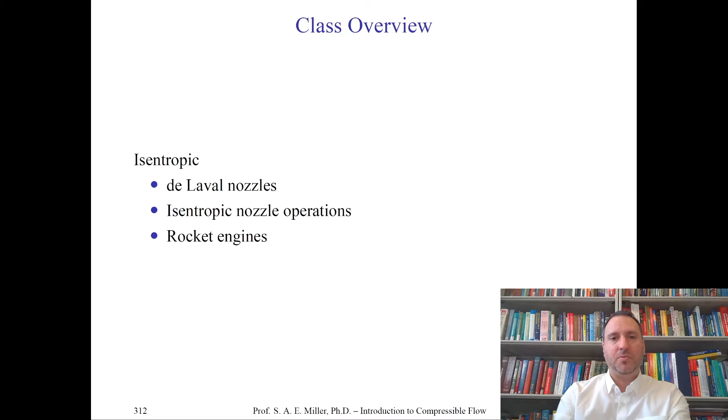Let's start off the class with a fun quote from one of the most famous people in aerospace engineering, Wernher von Braun. He wrote that the rocket worked perfectly, except for landing on the wrong planet. This was his comment on the V-2 rocket landing in London in 1944. This is written and quoted in Apollo in Perspective, Spaceflight Then and Now.

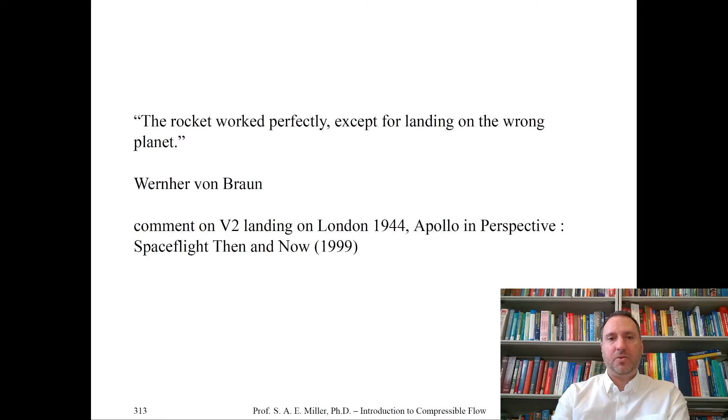Dr. von Braun was a remarkable figure who rose through and developed rockets during World War II and before, in Germany. During World War II, he developed the V-1 and V-2 rockets, used to bomb the United Kingdom. His ultimate goal was always to take rockets and propel people to outer space orbit and eventually other planets. In Operation Paperclip and beyond, he came to the United States and led NASA and the Apollo program, and without him, the United States would never have likely put man on the moon.

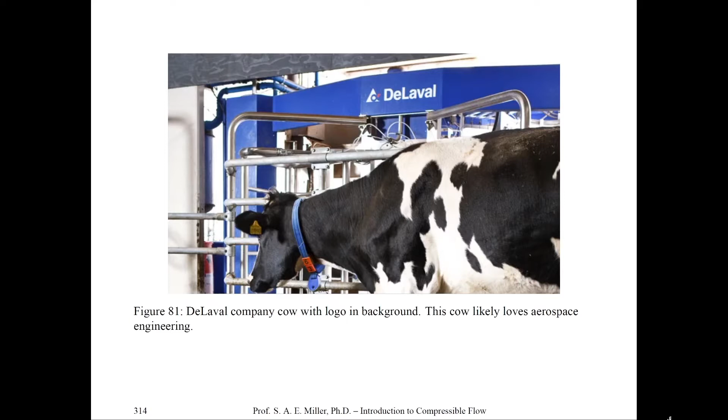Here is a picture of a cow. You might be asking yourself, what do cows have to do with aerospace engineering? I've put this particular figure, which I've labeled the DeLaval company cow and logo, in the background. You'll see the logo up top, DeLaval. And it's very much possible that this particular cow loves aerospace engineering. I wouldn't have any doubt about it.

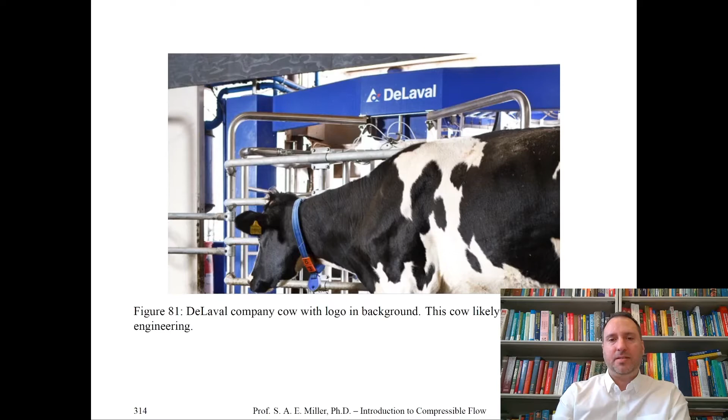And you might be wondering now, in this aerospace engineering class on compressible flow, what does a cow and the dairy industry have to do with aerospace engineering?

Here's the description from the company website. It says, DeLaval is a worldwide leader in milking equipment and solutions for dairy farmers, which makes sustainable food production possible, ensuring milk quality and animal health. DeLaval's solutions are used by millions of dairy farmers internationally every day. DeLaval was founded more than 130 years ago in Sweden, when the visionary Gustav DeLaval patented the cream separator. Today, DeLaval has 4,500 employees and operates in more than 100 markets. DeLaval, alongside Tetra Pak and Sidel, is part of the Tetra Laval group.

So, of course, it's no longer a standalone company. This quote was taken from their website in 2019. DeLaval himself was an amazing engineer and played an important role in creating one of the most important devices that powers rockets and aircraft engines and many other aerospace devices today.

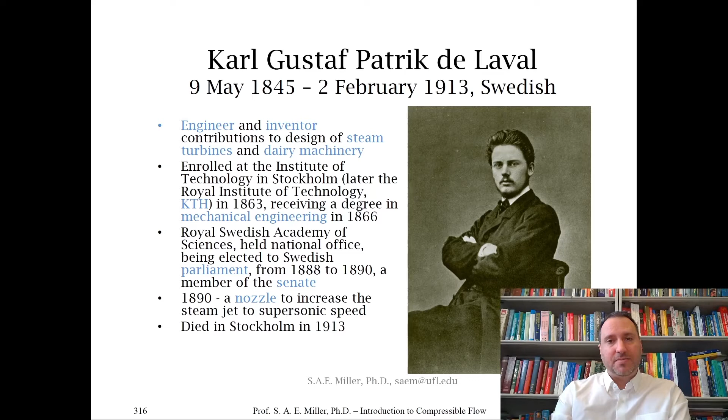Let's take a second to appreciate Karl Gustaf Patrik de Laval, pictured on the right. I think I see a few haircuts around campus just like Gustav's. You'll see that he was an engineer, inventor, and contributed to the design of steam turbines and dairy machinery. He enrolled when he was pretty young at the Institute of Technology in Stockholm, later the Royal Institute of Technology, called KTH, in 1863.

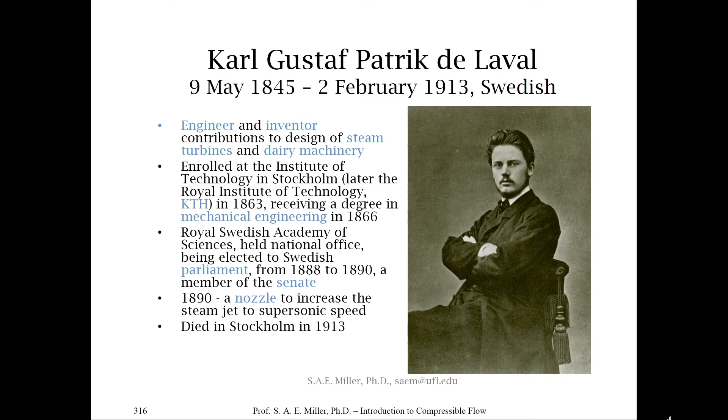I had the honor of actually going there during a conference and giving a seminar. He received his degree in mechanical engineering in 1866, like some of you are today, and he was in the Royal Society in Sweden in sciences, and he also held a position in Parliament, so he was a very multivalent person. Most important for this class, in 1890, he designed and created a nozzle to increase the steam jet to supersonic speed. And you see the connection now, because in the previous classes we looked at choking and accelerating flows to supersonic Mach number. He passed away in Stockholm, a beautiful city, in 1913.

A few other notes on DeLaval. He is the real originator of the Convergent-Divergent nozzle. He designed Convergent-Divergent nozzles for steam turbines to power dairy machinery. In the previous class, we looked at another of the company's designs, of course, for choking flow through a particular system of butterfly valves and a choked convergent nozzle to control mass flow rate exactly.

Indeed, he was Swedish and he worked in industry and mining, and left for his Ph.D., which was probably a good decision at the time. He started his own company in Stockholm that made cream separators, and he held these Senate positions.

What's interesting about DeLaval is he did this work intuitively, physically intuitively. Indeed, he had no knowledge, or at least no proof that we have at the time, that supersonic flow actually existed inside nozzles. This was not proved experimentally or really mathematically until many years later, in the laboratories of Prandtl in Germany.

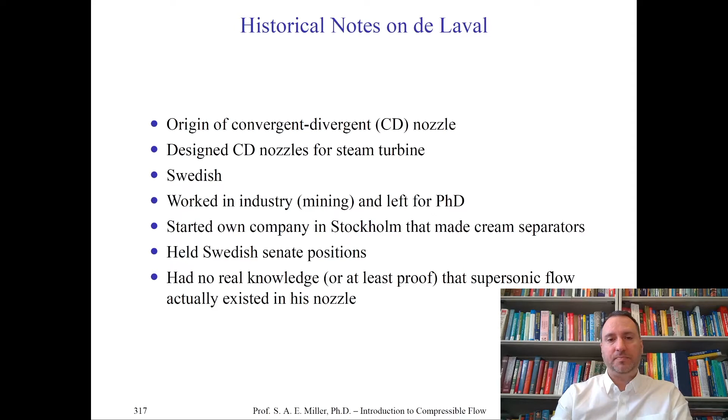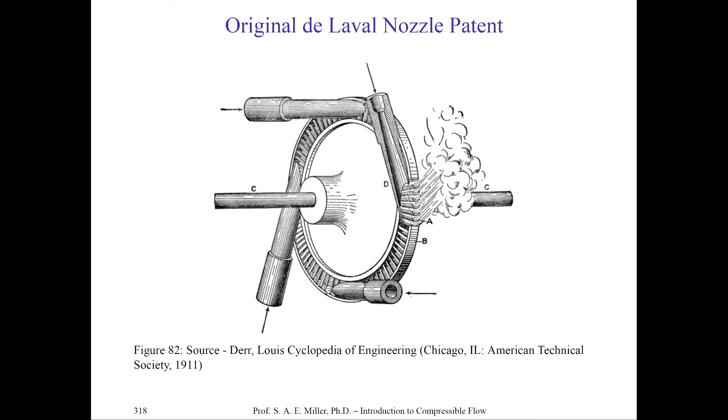These little nozzles, four of them in the cream separator design at least, allowed superheated steam to travel down through the plenum, through a convergent portion of the duct, through a choked condition, and then expand out and blow through the turbine, which rotates it.

This increased the power and efficiency of these particular turbines, which made his company world known. What's interesting is he did this design intuitively. He had no real physical understanding and justification of why this was working. This was done, once again, as I mentioned later, by Prandtl's group in Germany.

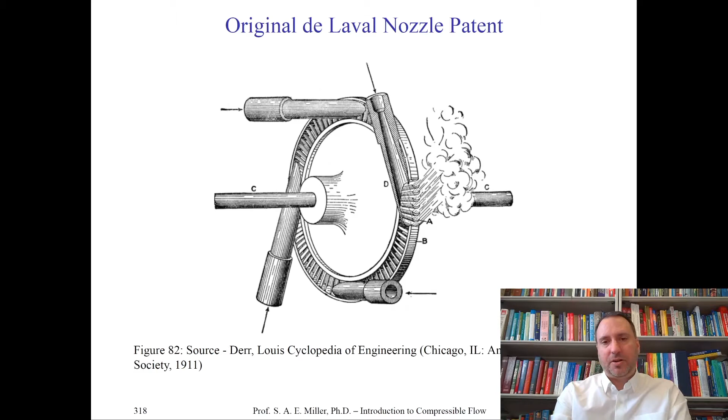Let's look at a more contemporary design from, of course, the DeLaval nozzle, which just refers to a converging-diverging nozzle. This is a picture I took from NPO Energomash in Russia, a Soviet company which still exists today under an umbrella company in Russia. This particular engine is the RD91 engine.

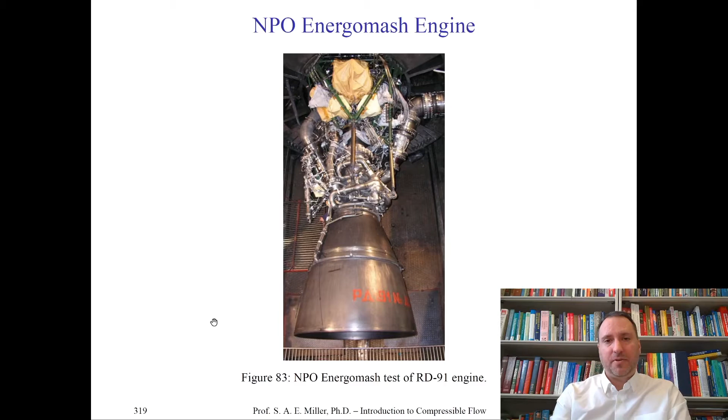Beyond all the ductwork above, you can see inside there's a combustion chamber, which is essentially a large plenum, and then there's a throat or choking area where a critical condition occurs, and the cross-sectional area of the nozzle increases to accelerate the flow out to the exit of the nozzle plane, which is this bottom part at the cursor. So we have gone, in less than a few decades, from cream separators to high-performance rocket engines.

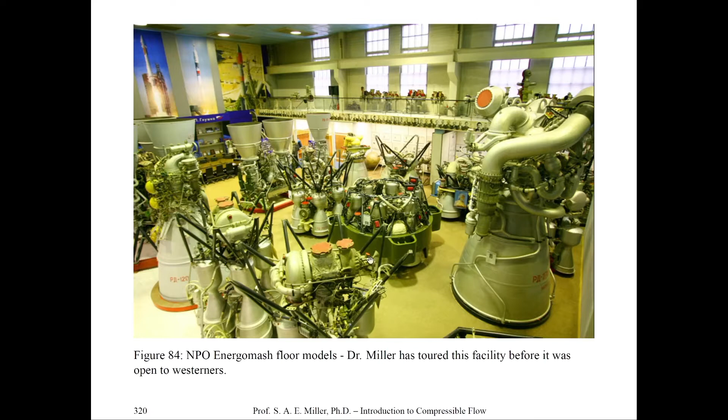Here's a picture of a series of rocket engines developed in the Soviet Union and Russia by NPO Energomash. This is their floor models. I had the fortune of touring this facility before it was open to Westerners when I was younger. You can see what's interesting is there are many different rocket engines, and from the combustion injector plate in each part of the plenum, for each of these types of RD nozzles...

...you can see there's, of course, a cross-sectional area which decreases. The flow goes through a convergent part of the nozzle. It is choked at Mach 1 and then is accelerated by increasing the area.

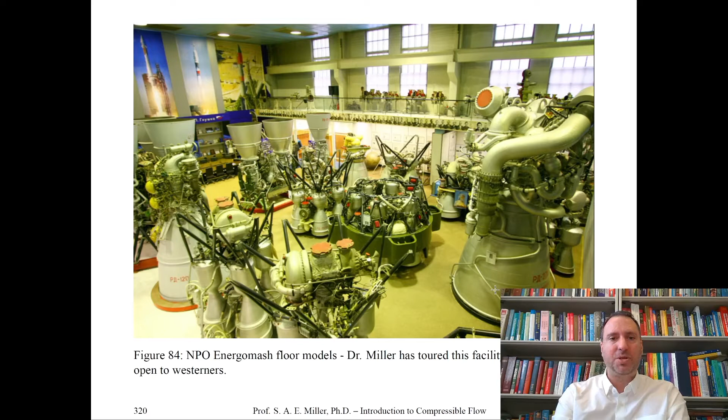You might be wondering, well, why don't we design the areas to be more aggressively increasing? Because that would decrease weight. Well, there's a lot of reasons for that which we'll talk about later in the class. For now, we'll just consider one-dimensional isentropic flow and get into shock waves. I think you'll see this is much more complicated than one-dimensional isentropic flow.

They all operate on the same principle of taking a high pressure, high temperature gas and accelerating it, choking it, and accelerating it out, taking the internal energy of the flow and converting it into kinetic energy, which of course creates thrust.

You'll see contemporary aircraft engines also use the same principles. It's all the same principle of taking the flow and efficiently converting as much of the internal energy as possible from the combustion process into kinetic energy, which creates thrust.

You can assess these types of engines with the basics of Reynolds transport theorem, which we already introduced, by using a combination of isentropic theory to convert internal energy into kinetic energy, and then doing a control volume approach with appropriate mass flow rates of injection for fuel and oxidizer with its exit velocities to find thrust. We'll try some of these problems in this class.

If we only had a converging nozzle, meaning we take away the divergent part, you'll see that our exhaust Mach number would only be limited to 1. So by adding all this weight, we gain a tremendous advantage in thrust. It's worth the cost of weight because we've created a high-speed, high Mach number flow, which increases thrust, and extracts more of the internal energy of the flow into kinetic energy.

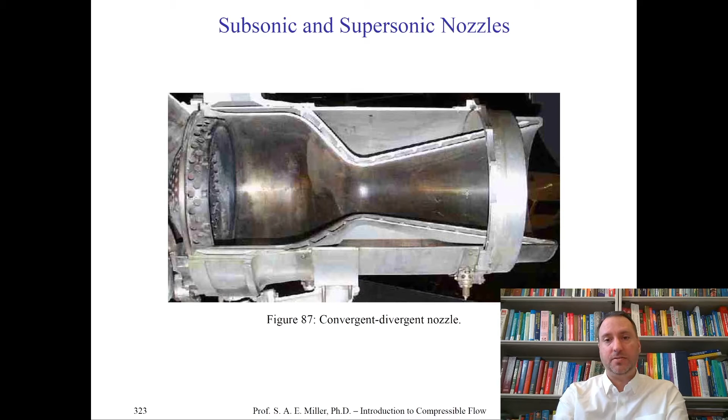Let's look at one example of this particular case for this particular engine. Once again, there's a minimum area, and we label that A-star, which is the critical or choked area. It has a Mach number, M-star, of 1 by definition, and U-star, the velocity at the throat of the nozzle, will be, of course, a-star, which is the speed of sound at the throat.

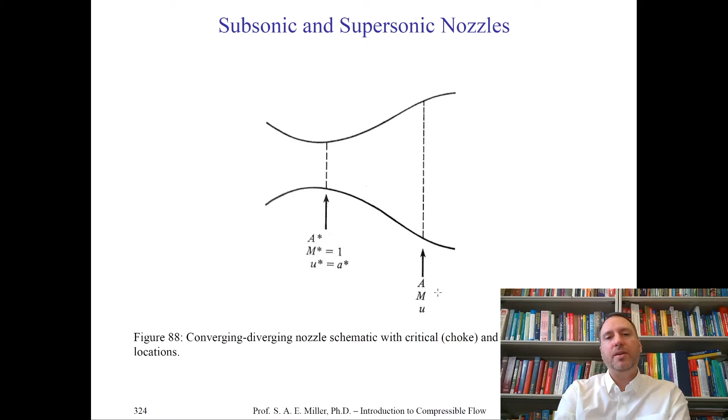At any other position, we've developed our isentropic tools, at least, to estimate the Mach number, velocity, and area. Remember, through the Mach number area relation, we can find out the Mach number at any other area relative to the choke condition, and from that Mach number and other thermodynamic conditions of P-naught, T-naught, etc., which are constant through the nozzle for isentropic flow, we can calculate all other thermodynamic and field variable properties.

Fascinating. Let's return to the derivation of the Mach number area relation to put it in a form which is a little bit more useful for the nozzle problem and problems alike it, which we'll use through this class. We'll again seek the Mach number area relation.

Please remember that we can choke the flow at the minimum A. If the flow is choked, and it doesn't necessarily have to be, but if it is choked, we'll call that area A-star, the critical area or area of a choked flow, minimum area in a converging-diverging stream tube. Recall the conservation of mass.

Rho U A equals rho U A at station 1 and 2. We'll just let station 1 be noted by sup star. So rho-star, U-star, and A-star in equation 264 of this slide deck corresponds to the density, velocity, and area at the throat of the nozzle, which is right here. The right-hand side, rho U A, will be any other position marked in A as a function of x, for example, from, say, the inlet or outlet of the nozzle.

A is only a function of x in this case. It has area, Mach number, and velocity. So now we've balanced the mass conservation.

Now look at the left-hand side and note that because M equals 1 at the choked condition by definition, we can write U-star equals C-star through the equation M equals U over C, or 1 equals U over C, therefore U equals C-star. Let's substitute that into our equation and solve for A over A-star. So that's what we have in equation 265. And let's simplify that a bit.

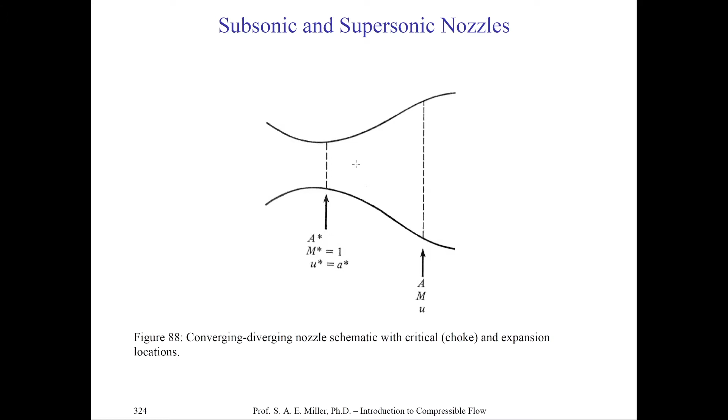That means the stagnation density rho naught, stagnation temperature T naught, and stagnation pressure P naught are constant through the flow. So we can use our critical condition previously developed for rho, and write rho naught over rho star equals gamma minus 1 over 2, to the 1 over gamma minus 1.

See why I developed this relation related to equation 265 in our recollection. We developed 266 in a previous class.

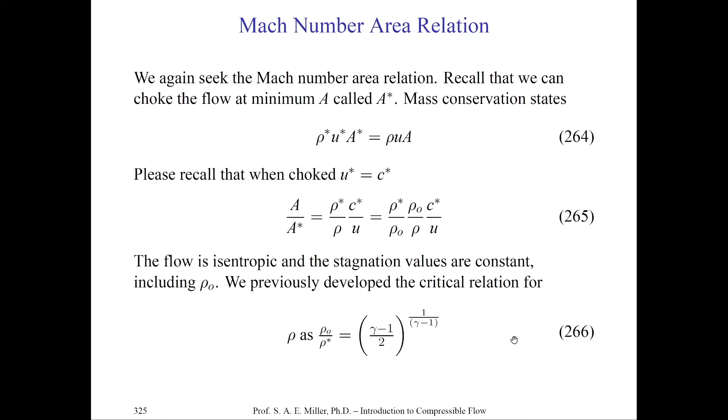Also recall that we developed a relation for C star. Remember, M equals U over C, therefore U over C star squared goes as M star squared. And we developed our critical condition of M for 1, goes as gamma plus 1 over 2 M squared, all over 1 plus gamma minus 1 over 2 M squared. That was also from our previous class.

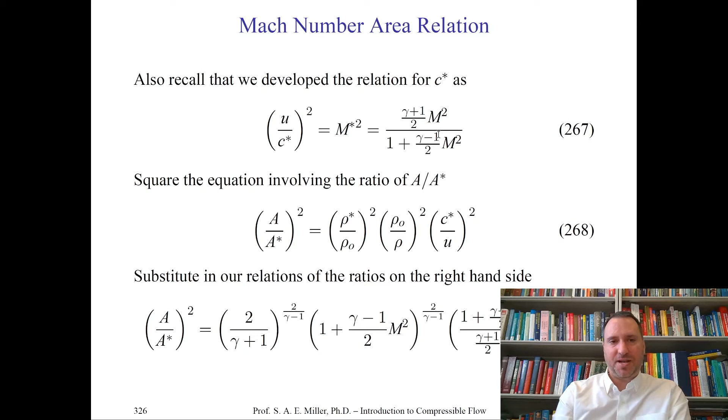Now we might imagine we can square the equation involving the ratio of A over A star, equation 265, squaring each term according to the laws of algebra. We'll now have A over A star squared goes as rho star over rho naught squared, rho naught over rho squared, times C star over U squared. Now we can easily substitute our relations of U over C star squared and rho naught over rho star into 268, and we'll find equation 269 on the slide deck.

Now we'll have A over A star squared equals 2 over gamma plus 1, to the 2 over gamma minus 1, times 1 plus gamma minus 1 over 2 M squared for the second term. And the third term from 268 to 269 is 1 plus gamma minus 1 over 2 M squared, all over gamma plus 1 over 2 M squared.

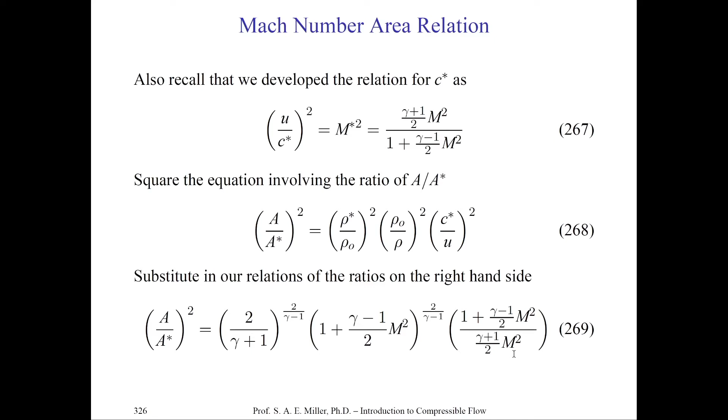Let's now try and simplify equation 269 on the slide deck to something a little simpler, which I've done for you, and you're welcome to try this yourself.

We now have a beautiful form of the Mach number area relation for choked flow. It goes as A over A star squared equals 1 over M squared times the quantity of 2 over gamma plus 1, times 1 plus gamma minus 1 over 2 M squared, in the quantity of gamma plus 1 over gamma minus 1.

Look at this equation carefully. You'll see the most familiar term in this class, 1 plus gamma minus 1 over 2 M squared. We see this term coming up over and over. And in fact this is no coincidence.

You'll see in the isentropic tables, which we formulated and given in the class handouts, one column for A over A star, and the first column as Mach number. Therefore you can easily evaluate this equation for Mach number or area ratio, as long as the flow is choked. That's the meaning of A star. We now have the all-important Mach number area relation.

This equation shows M is a function of plus or minus A over A star. There are two values indeed of M corresponding to the solutions of this equation, as we discussed earlier in a slightly different form of the area Mach number relation and its derivation.

These relations of all these values, including A over A star, are tabulated in the famous isentropic tables of NASA Ames, the so-called Ames tables, which I've put in as a file, an original PDF copy in your class handout. Some of the graphs in the class handout with the tables are photocopies, essentially, attached to the tables. Remember, there are no mathematical or physical solutions for A over A star less than 1.

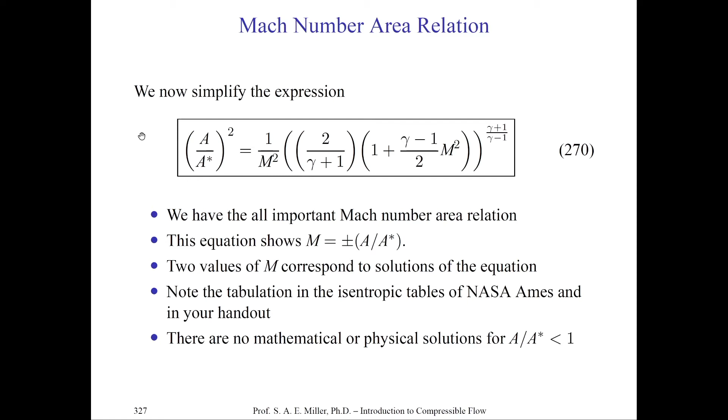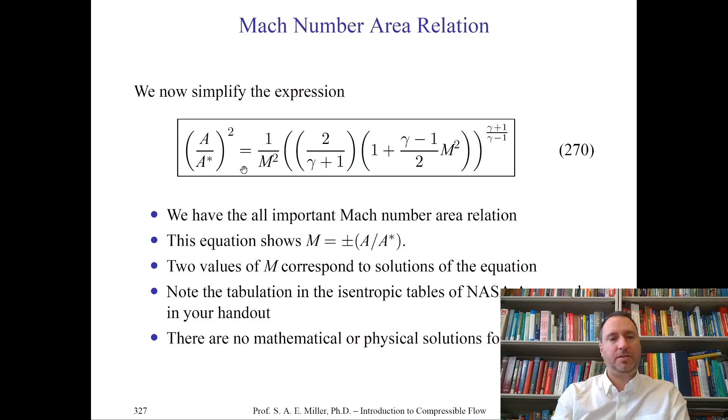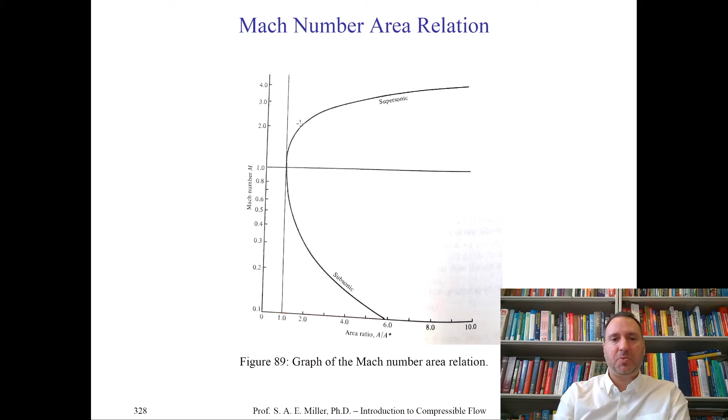Say we have a DeLaval nozzle that accelerates flow. There's subsonic flow in the convergent part of the nozzle, which would correspond to, say, some area A over A-star of 2, which would be Mach 0.3. And if the area of the exit over A-star is 2, then we would have an exit Mach number, not fully expanded Mach number, of about 2.2. So do not confuse exit conditions of devices with fully expanded conditions, and we'll discuss these subtle differences later in the class and through your homework.

Let's look at a graph of this with respect to a nozzle. Here's figure 90. We show the variation of Mach number in a typical convergent-divergent nozzle with a particular transonic throat.

In this condition, the walls are drawn with a hatched line, and the flow moves from left to right. Here's the plenum, where the Mach number is very, very small. Here's the throat, where the flow chokes, where we achieve m equals 1, and the area of the throat, A sub t, equals A-star. And the flow accelerates to higher speeds and becomes Mach number greater than 1.

Remember, the Mach number-area relation analysis dictates whether the flow accelerates or decelerates in divergent or convergent parts of the flow, respectively. Up here, we're saying the area of the inlet, A sub I, over A-star, the reference choked area, is very, very large — it goes to infinity. At the exit of the nozzle, defined as A sub E, over A-star, the reference choked area, is a particular finite quantity, right here.

Note that the Mach number downstream in the exhaust of the engine or nozzle can be even higher because the flow continues to expand as if there was an invisible nozzle there, dictated by the particular shear layer of the jet flow.

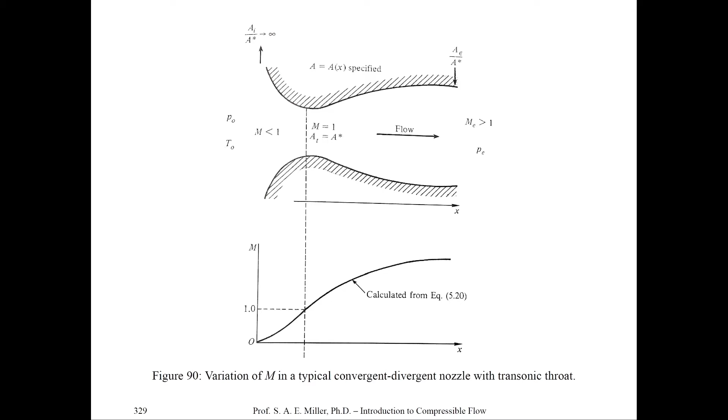Now in this case, we have some stagnation conditions. The combustion process or turbine or whatever is in front of the nozzle device, or a wind tunnel even, has particular stagnation densities, pressures, and temperatures, which we denote as P naught and T naught. This is an isentropic flow through the nozzle, meaning P naught and T naught are constant through the whole flow and even out into the exhaust of the nozzle, until there's turbulence in the nozzle exhaust. We denote the throat as m equals 1 for the transonic condition and A sub t equals A-star.

We might ask ourselves, how does Mach number vary in this particular flow? Well, it varies according to the area-Mach number relation, which in this graph is equation 520, but in this class is equation 270, which is graphed in figure 89 of the slide deck.

So let's see. We start from about a creeping or very slow speed subsonic flow of Mach about 0. On the x-axis of figure 90, we have the x-axis corresponding to the x-axis of the nozzle, and the y-axis is Mach number. This dashed vertical line, between the graphs of Mach number in x and area and the nozzle geometry, corresponds to the transonic or choked condition. You can see by definition that has a Mach number of 1 on the y-axis, which ranges from 0 to some high value.

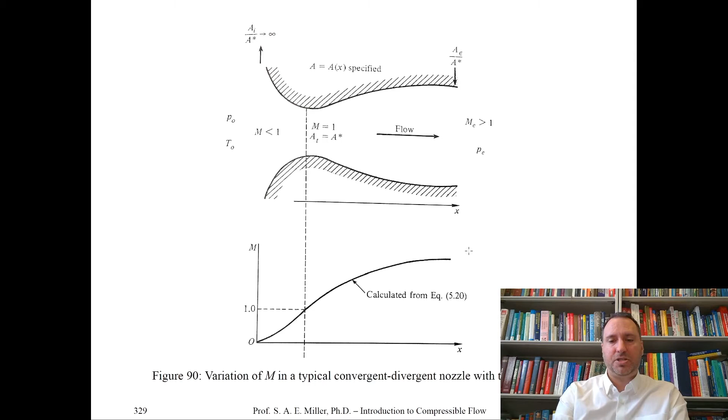The flow starts from 0 and gradually increases, becoming transonic and choked at the nozzle throat, then increases its Mach number as we move downstream. Now, it's very rare to have a convergent-divergent nozzle with a Mach number that continuously varies smoothly. If it does, of course, it's an isentropic flow. In reality, things are much different, and we'll start to transition to those cases in this class.

Before we do that, let's look at the graphs of P over P naught and T over T naught in these particular flows. You should be able to draw these graphs yourself. They might appear on exams or homeworks.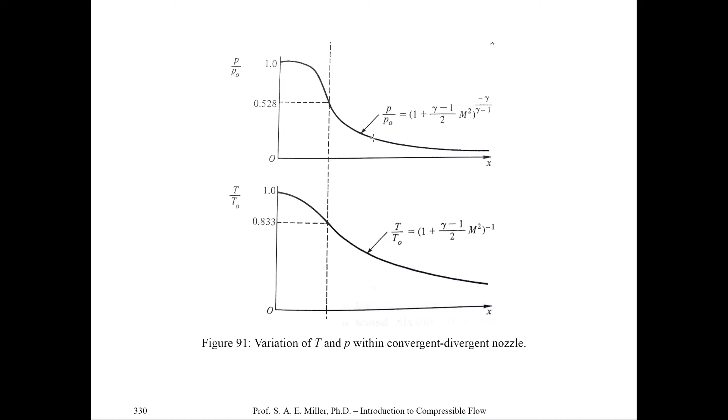However, for graphs of these problems, we often show T over T naught and P over P naught, which is customary and traditional in rocket engineering.

Now, you might be thinking, what happens if the area of the throat is not choked? Then we entirely have subsonic flow through the nozzle, and it's much less common to have an isentropic flow through a convergent-divergent nozzle that's operating subsonically. Generally, there's not much point in life to having a convergent-divergent, that is, a DeLaval nozzle, operating subsonically. But there are a few situations which maybe we can look at later in this class.

So ideally, the flow in the nozzle expands isentropically. Remember, this is not always the case, and it's not always the case that we hit the transonic or choked condition at the nozzle throat. Take a look at figure 92 shown here.

Once again, we have a total pressure in the plenum with corresponding density, total pressure and static pressure at a low Mach number. There's an area of the throat in the converging-diverging nozzle, and the direction of the flow is from left to right. There's also an exit pressure, which we'll write as P sub E. This might be viewed as a back pressure in a subsonic flow of the nozzle.

P sub E is not necessarily equal to the ambient pressure outside the nozzle for some cases, especially in supersonic flows, which we'll talk about later in this class for nozzle exhaust. Nonetheless, the subsonic flow through the nozzle is pressure-driven from a total pressure P naught to a static ambient exit pressure P sub E. This pressure ratio, P naught over PE, needs to be large enough to drive the flow to supersonic conditions at the exit and choke the flow at the throat.

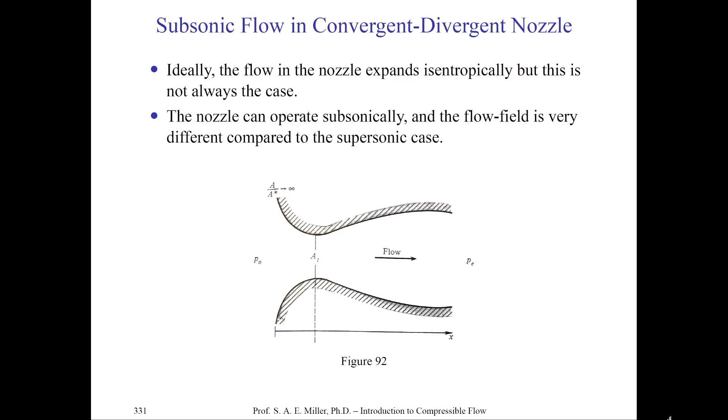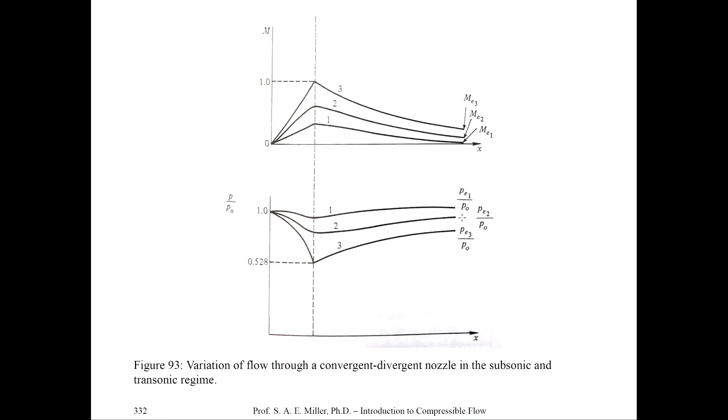Notice I never said AE over A-star, because A-star would denote that the nozzle flow, or the convergent-divergent stream tube, is indeed choked. Line 3 indicates that the flow has choked at the nozzle throat, which we call A-star. We would then have P over P0 go down to the critical condition, 0.528 for gamma 1.4, the same as we saw in the supersonic case.

But we just arrive at that condition, and the pressure ratios are like epsilon off to have the flow return to subsonic and have the divergent part of the nozzle act again as a diffuser. It's a beautiful transonic flow, very hard to obtain in the laboratory. You'd have to very carefully adjust, with a computer, the ratio of P0 over the exit pressure - meaning controlling the total pressure in the plenum - to achieve this beautiful subsonic-transonic flow through the whole nozzle.

Remember, there are essentially 4 types of flows you can obtain with a convergent-divergent nozzle or stream tube, which we showed in previous classes. Let's be careful and make some notes about entirely subsonic flow through the isentropic nozzle.

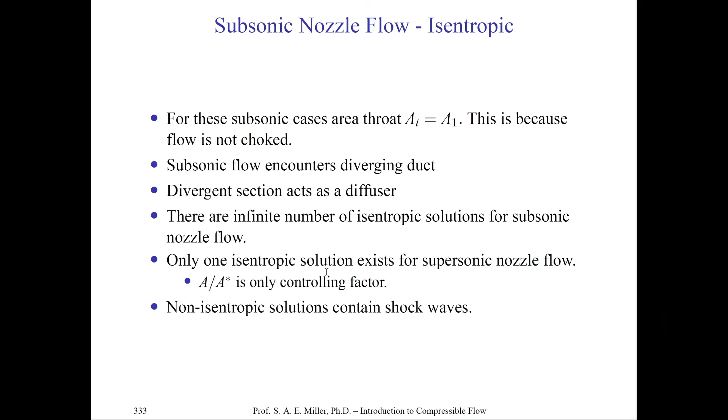For these cases, we might say that a reference area is only the throat area AT, but we can never use the A-star values in the table, because they have the built-in assumption that we've reached Mach 1. Therefore you cannot use A over A-star values, like the Mach number area relation for choked flow - because the flow is not choked. Please be very careful in your analysis not to make this particular mistake.

Now, a subsonic flow can often encounter a diverging duct. In this case, the flow will slow down according to the traditional area-Mach number relation. As noted, the divergent section in these nozzles, or converging-diverging stream tubes, acts as a diffuser. And a diffuser's objective, unlike a nozzle, is to slow down the flow and recover as efficiently as possible all thermodynamic variables of pressure and temperature, taking the kinetic energy in the flow and trying to preserve it without losses, converting it to internal energy, like enthalpy.

You will see that there is indeed an infinite number of isentropic solutions or flows for the convergent-divergent cases. You'll see that I can have an infinite number of lines, or possible isentropic flows, between 1 and 2, as an example.

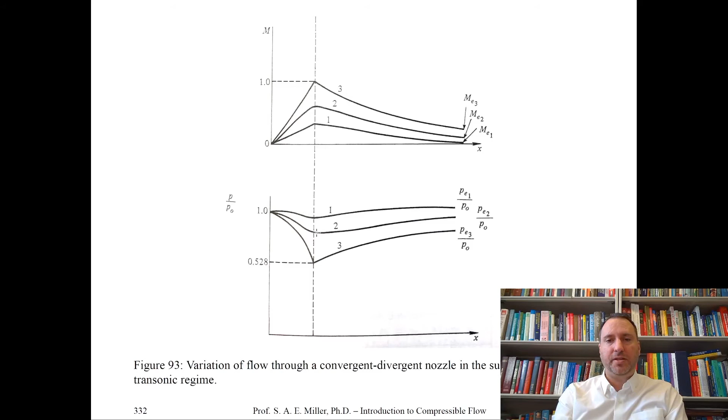That's not necessarily true for supersonic flows. Indeed, for DeLaval nozzles that have convergent-divergent properties, there's only one solution that corresponds to the isentropic case. Not only that, the nozzle shape itself must be carefully designed using a method called the method of characteristics, which we'll talk about later in this class in a single lecture. It is very complicated, and you'll see that for isentropic convergent-divergent nozzles, it must be designed with method of characteristics for an isentropic solution.

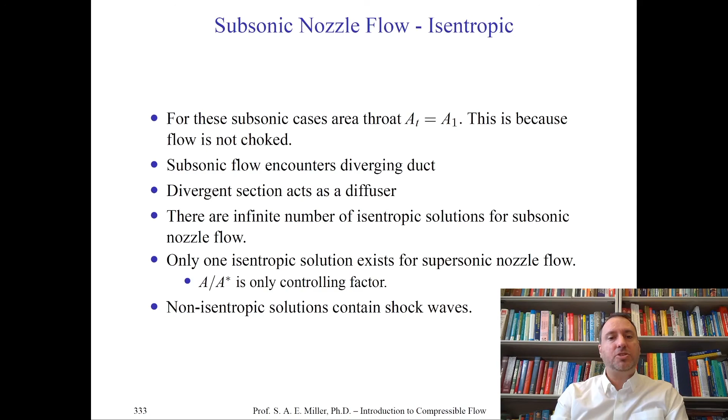You can also have convergent-divergent nozzles that are supersonically operating, but of course they'll have losses in them, and they'll have systems of expansions and shock waves possibly in them. There's only one isentropic solution for the entire nozzle with exhaust flow. You'll see that non-isentropic solutions, and there's a whole family of them, an infinite family of possible solutions that contain shock waves inside the nozzle.

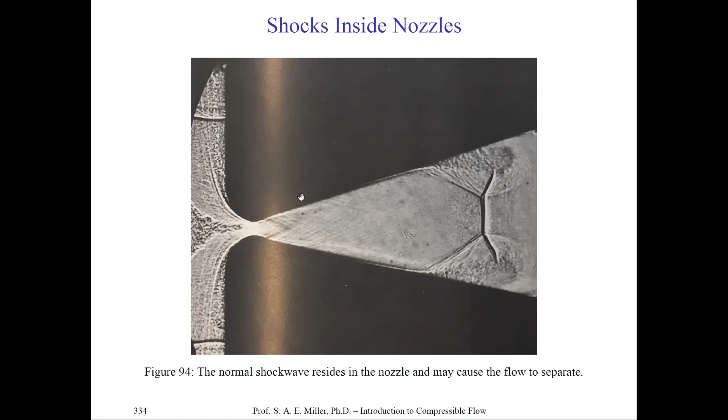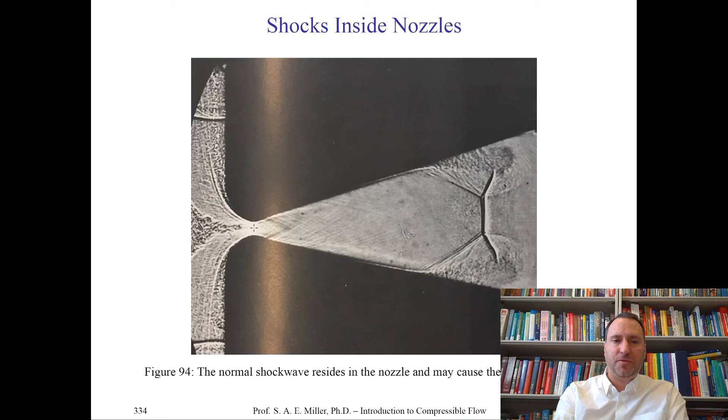You'll also note that the DeLaval nozzle, a few pages back, had straight edges in his patent, just like this nozzle. Indeed, he had to have very high pressure ratios to make sure normal shocks were not within his nozzles. But when DeLaval started his nozzles in the dairy industry, they had low pressures, and he had to raise them as fast as possible to push the normal shock, which at first appears at the throat, downstream and outside of the nozzle.

If there's no viscosity, you can view this as a discontinuity in the equations of motion, which you have not dealt with in your differential equations classes up to this point. It's very unlikely you've even dealt with discontinuities in your equations when you study partial differential equations, if you take one of those classes.

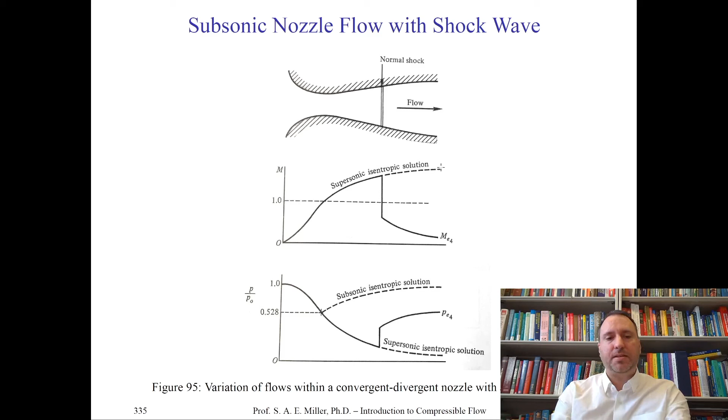Take a few minutes and compare the solutions between isentropic flow and the flow with the shock wave. Don't concern yourself too much with the physics of shock waves, because we'll have a lot of classes on shock waves coming up. For now, concentrate on isentropic flow, but remember, isentropic flow breaks down in these cases.

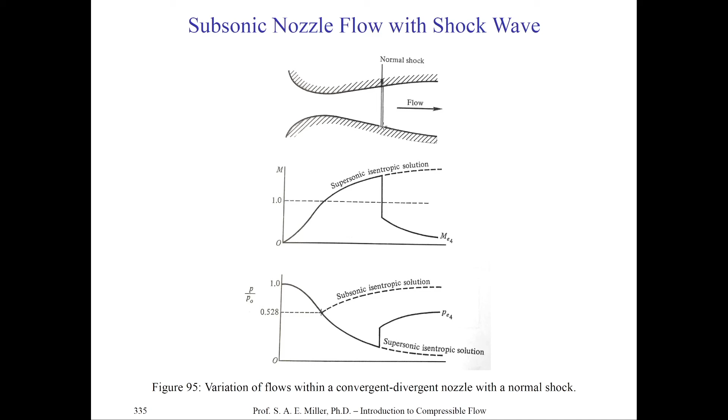One final thought is that we can treat the whole flow in this situation as isentropic except across the normal shock, and we'll learn to solve these problems with a combination of shock wave theory and isentropic theory in this class. Let's now turn our attention to the mass flow rate within particular nozzles.

Remember, the mass flow rate increases as the ambient pressure around the nozzle decreases, that is, the exit pressure is decreasing, or if we hold the ambient pressure constant and increase the total pressure ratio. Notice I've not said anything about temperature. The mass flow rate really depends on the pressure ratios which drive the flow.

It is easiest to assess the mass flow rate, m dot, based on the throat conditions, but not in practice, and we'll find out why through examples. A nozzle's mass flow rate can always be measured with density, cross-sectional area, and velocity at the throat. We can also measure it simply by measuring the oxidizer and fuel injection rate in the plenum of the nozzle, which is true for aircraft engines or rocket engines.

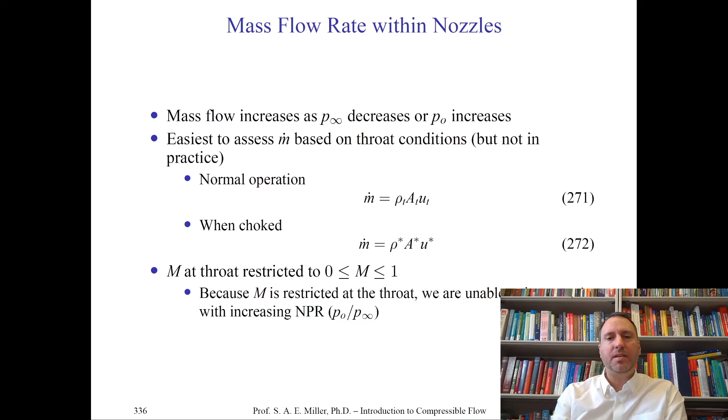When these flows are choked, we can write equation 272: m dot equals rho superscript star, A superscript star, u superscript star. Remember, when I say sup, I mean superscript. The nozzles and throats are choked and restricted from the plenum to the throat between Mach number 0 and 1.

It is possible to have a supersonic Mach number going into a nozzle, and we'll see examples like that in coming classes. But for nozzles and propulsion systems themselves, the Mach number will always be less than 1 before the nozzle. If that wasn't the case, we would only want a divergent nozzle. Can you think about why this is the case?

Because Mach number is restricted at the throat to being 1 or less, we will be unable to increase the mass flow rate with increasing NPR, which we define as P naught over P infinity. Here, P naught is the total or stagnation pressure in the plenum upstream of the nozzle, and P infinity is the pressure in the atmosphere around the flight vehicle. NPR stands for nozzle pressure ratio. Remember it.

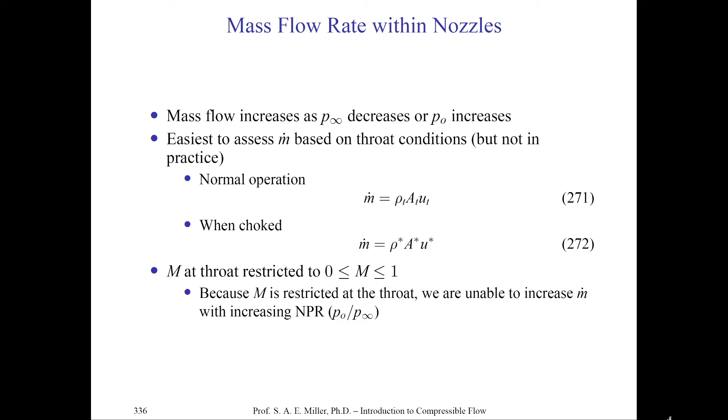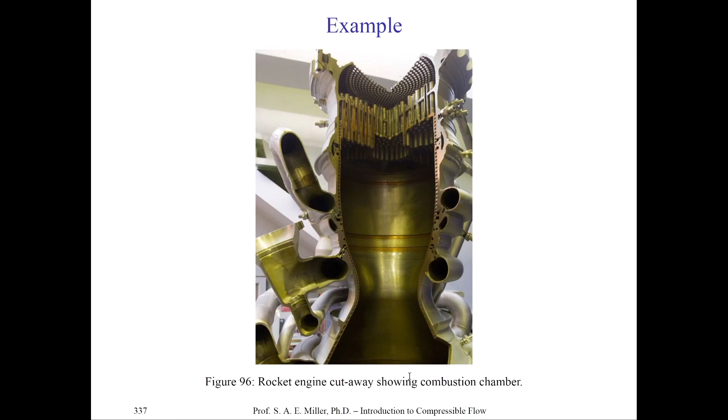I now show a number of examples which I would like you to read carefully and try out for yourself. These involve the types of isentropic flows of calorically perfect gases through nozzles—that is, isentropic flow through the famous DeLaval nozzle. These are classic problems which almost all aerospace engineering students try at some point in their education and career. I'm sure that many decades from now you'll look back fondly and think about how this physics applies to many different cases. I'll show the problems now for you to try and work through.

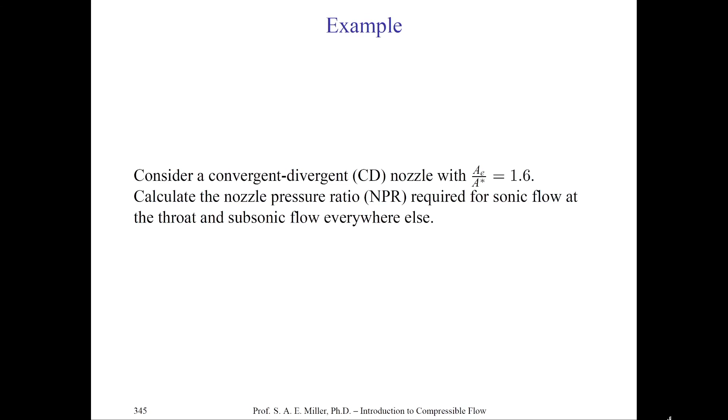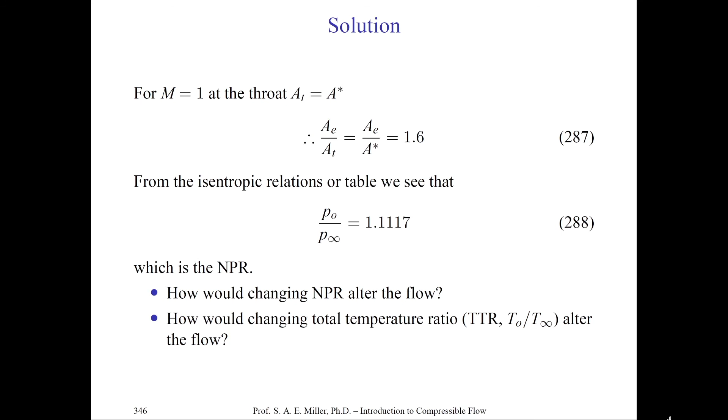I hope you found those examples constructive, and we can talk about them one-on-one in our sessions. In this class, we looked at the famous DeLaval nozzles and their history, and who was Gustaf de Laval, certainly a contemporary figure who has influenced our society.

Remember, he worked by physical intuition and was not aware of the mathematical theory and the so-called experiments to even prove the flow was supersonic inside his nozzles. Indeed, he had a very high pressure ratio to drive them, and his nozzles could have been designed more efficiently instead of having just the straight wall divergent sections.

We then looked at the physics through a new formulation of the Mach number area relation for Convergent-Divergent or DeLaval nozzles. We then looked at what happens in real nozzles for certain pressure ratios where the back pressures can't be met through supersonic isentropic theory.

Remember, there's an infinite number of subsonic isentropic solutions for nozzles, and there's only one particular supersonic isentropic solution. There indeed is an infinite number of supersonic solutions for nozzles, but they are not necessarily isentropic. We saw how a shockwave forms, and we looked at graphs of both isentropic and non-isentropic flow through the nozzles. We also looked at a number of beautiful examples of rocket engines where this concept has been applied.